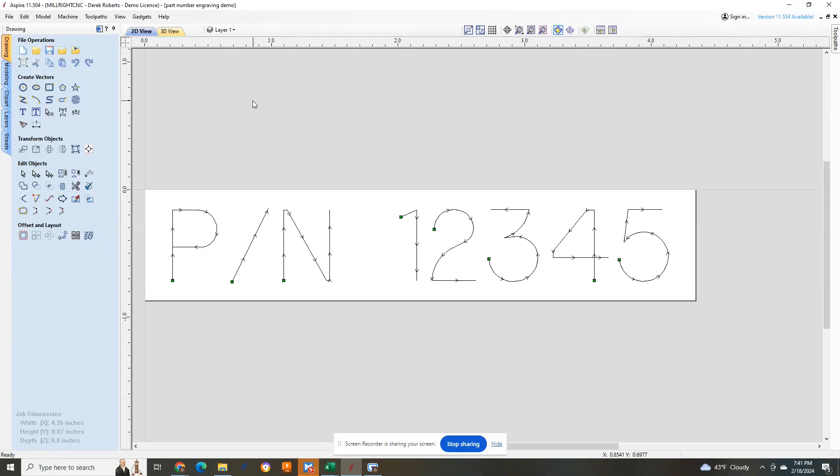I already have a file up, but once you hit the New file, you're going to be brought to this for a job setup. This is a single-sided job, and here I've put in my part dimensions that I just measured with a caliper. I'm going to zero to the material surface, which means I'm just putting the bit on top of the material, at the very top of it, and calling that my Z0. My XY datum is going to be this top left corner if you were looking down at the part.

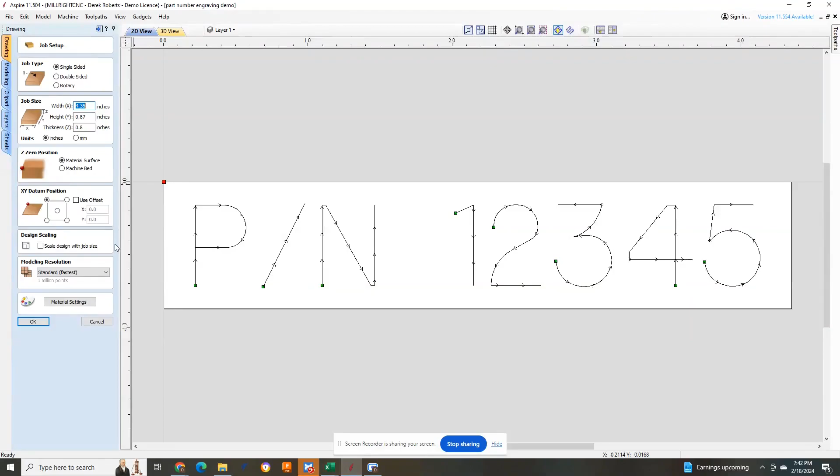I'm going to be using a vise on the Mega V2, so if you look at where my mouse is moving, you can imagine that this is the fixed jaw of the vise, and I've got the floating jaw that's going to be moved in to clamp this part. Whenever I use a vise, I always zero to the corner of that fixed jaw for my XY position. So I'll hit OK. I already have part number 1, 2, 3, 4, 5 here.

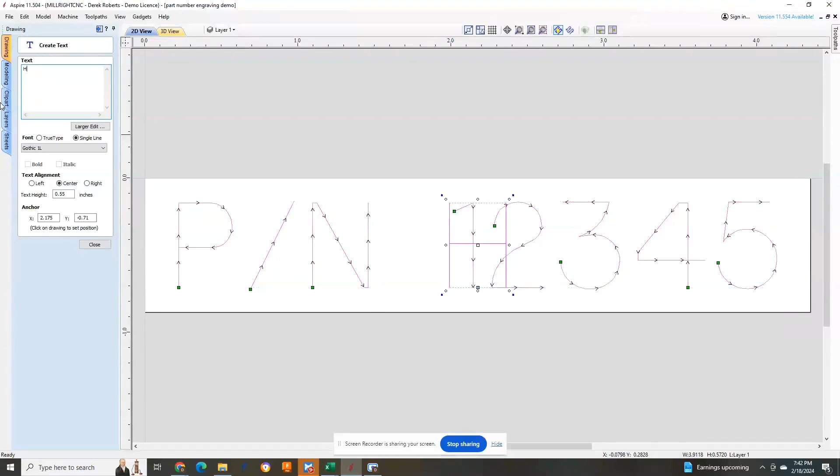If you wanted to put some new text in, you could go over to the Create Text dialog box here. But if I want to edit this text, I'm going to left click and drag over everything while I'm in the 2D view, and you see it turn that purple, magenta, whatever color you want to call that. And I can go back to the Create Text dialog box, and it's going to allow me to edit that. So I could put, hey guys, I could put whatever I want there.

All right. And you see I've already calculated that toolpath. That's why everything still remains there. So I'll just put back what I have, part number 1, 2, 3, 4, 5. My text height I can describe here, whether I want it to be tiny text, big text, whatever. Text alignment is going to be center.

And then my anchor point, I can describe a very specific position, or you can just kind of grab this around here. As you see, you move this around, you get a set of crosshairs that shows your vertical and horizontal alignment. And when you see the vertical dotted line and the horizontal dotted line, you know that you've got everything centered. So I'm going to hit close here.

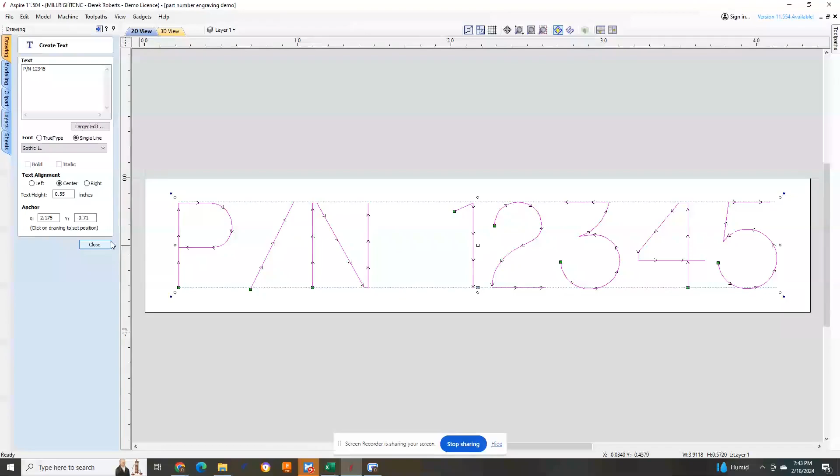Moving on to the Toolpaths tab. If you don't see the Toolpaths, you can just click on Toolpaths and show Toolpaths tab. You'll notice something that may frustrate you here. If you don't have that pinned, then whenever you click off this here, it's going to disappear. But just click the toolpath and click this little pin in the upper right corner, and that's going to keep everything there. You see I already have a quick engraving toolpath made.

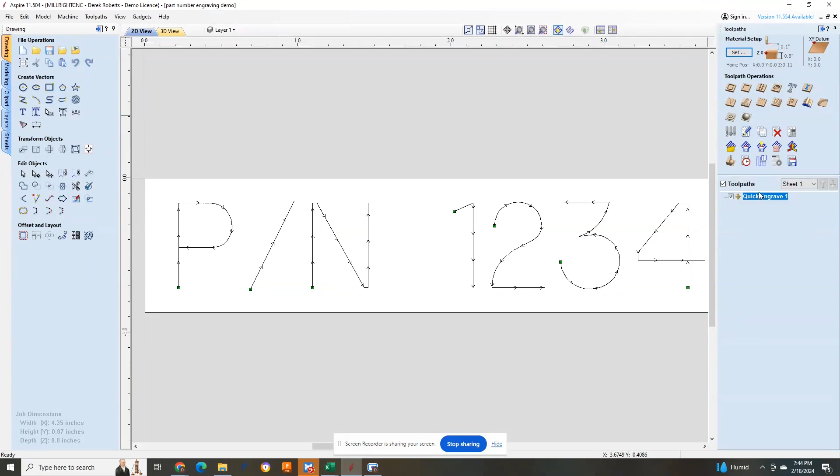If you were just starting out on a fresh file, you're going to come right here to quick engraving toolpath, click that. But the dialog is going to look the same. I'm going to edit that because I already have it. If you just click the quick engrave toolpath, you're going to get this dialog here. I have a depth of 0.008.

That's really shallow. So because I'm doing aluminum, I don't want to take multiple step downs in it. I'm using a V-bit that's really better suited to wood, but I can still achieve aluminum engravings with that as long as I am correct in how I set up my parameters. Now to set the parameters, I'm going to go to Edit. Here you see what I have set for the tool here.

I'm going to run the spindle at 15,000 RPM. I'm using a pretty low feed rate here for the Mega V2. The Mega V2 can go into the hundreds of inches a minute, but when you think about it from the perspective of the tool, if you can follow my mouse here and you just think about the point of this tool here, that is not really getting an opportunity to clear a bunch of chips.

So if you think about it in the chip load concept, if you had a really big tool, it can take a lot bigger chip load, or it wants a bigger chip load to operate in kind of its ideal state. If you've got a little bitty tool, then it wants a small chip load.

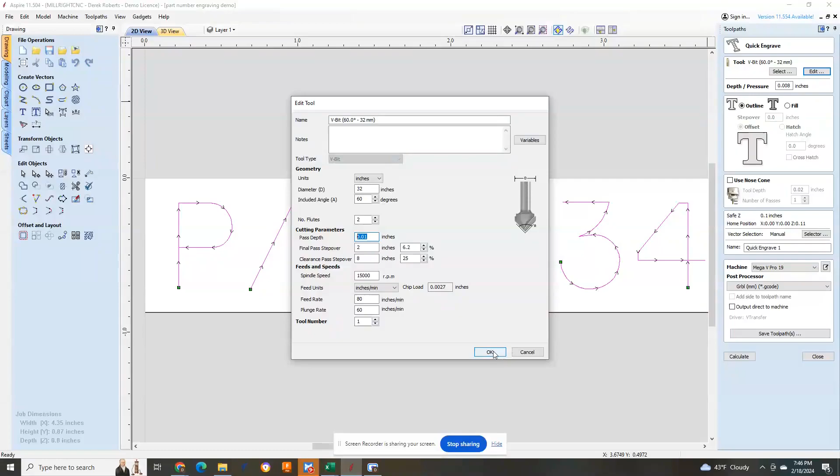You could, say, set that to 30 thousandths, in which case this 0.01 or 10 thousandths pass depth would make it take 3 step downs. But I'm happy with these parameters, and I'm going to click OK. From here, I would calculate the toolpath. I've already done that, but I'm going to calculate the toolpath.

Whenever you click that, it's going to move you over to the 3D view. I'm going to reset the preview because I think I've already done that, but you would be able to preview all the toolpaths, and it's going to show you what that looks like. My computer's moving a little bit slow, but there we go. Part number 1, 2, 3, 4.

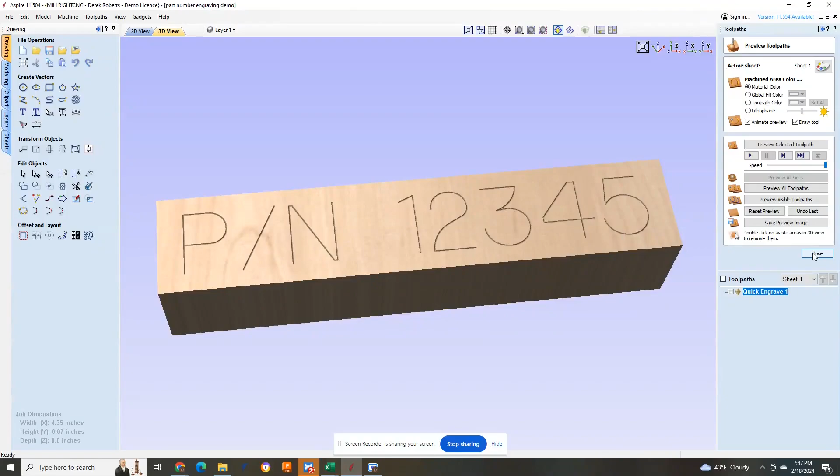When I want to save that, I can click close, and I will click this toolpath so it knows that I want to save it. I would click the Save Toolpath button there. Again, if I did that a little too quick, it's right here in the Toolpaths tab. You hover over it, it shows Save Toolpath. And from here, you can set whichever post processor you want to use.

I'm going to be using a Mega V2 XL with a Grbl control, so I'm going to select the Grbl post processor. If I was using the Masso control, I would just use Masso ATC arcs, inches, or millimeters. I like to work in millimeters, so I'm going to just select Grbl millimeters because I'm on a Grbl control. I'll save that toolpath. It'll bring up a dialog box and allow me to save it to a USB drive or somewhere on my computer.

The workflow from here is going to be, I will walk that USB drive out to a laptop that I have set up on the Mega V2. I'll plug it in. I'll open up something like Universal G-Code Sender. There's a lot of different G-Code senders available to you for free, but I would use something like Universal G-Code Sender, connect to the machine. I'll home it. I'll set my work 0.

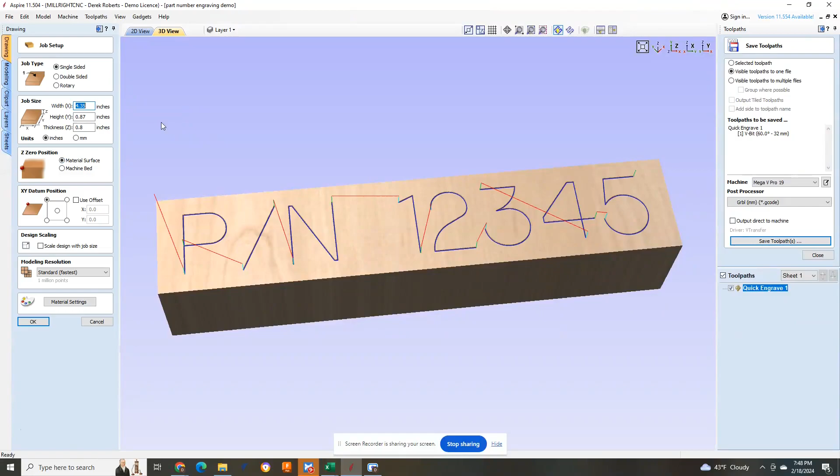Back on that topic for a moment. You have to make sure that whenever you set your work 0, I'll go back to 2D view as well, the machine needs to know that its 0 point is here. You can't just set that in your CAD and CAM or VCarve or Aspire or Cut2D. You can't just set that here. The machine does not know that you told the file it's going to start right here. Without informing it, it may think that the start point is over here, over here, over here, or over there. So you have to set that 0 point.

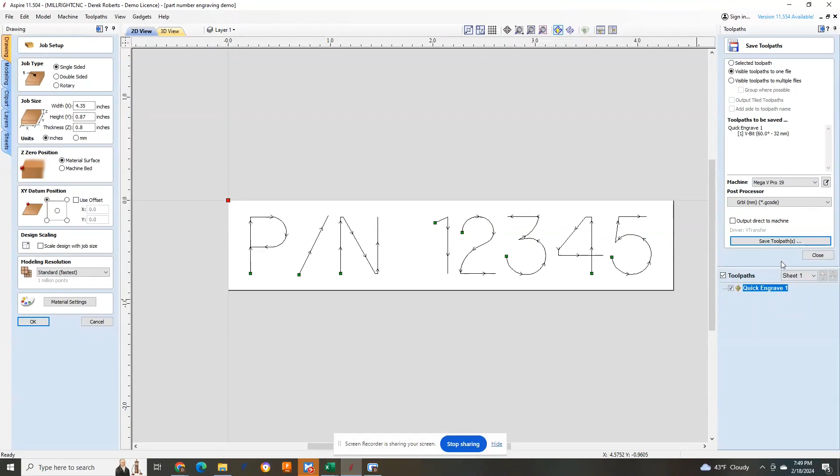But I will save the toolpath. I'll take it out to the machine, and let's move the video on to showing the engraving with the Mega V Pro now. So we have the part clamped up in the Mega V Pro XL. Let's check out the engraving.

All right, so I put a little cutting oil on there just to kind of aid in everything. I'm going to wipe that off. Came out really nice. I'll grab my tool to get this out of the vise. Yeah, came out really nice. There we are.

So I realized that that was a little bit of a bigger engraving at about a 1/2 inch tall. This one here is 0.1 inch tall. So let's see the Mega V Pro do something a little bit smaller. We'll just wipe that off. Came out nice. Again, that's about 0.1 inch tall.

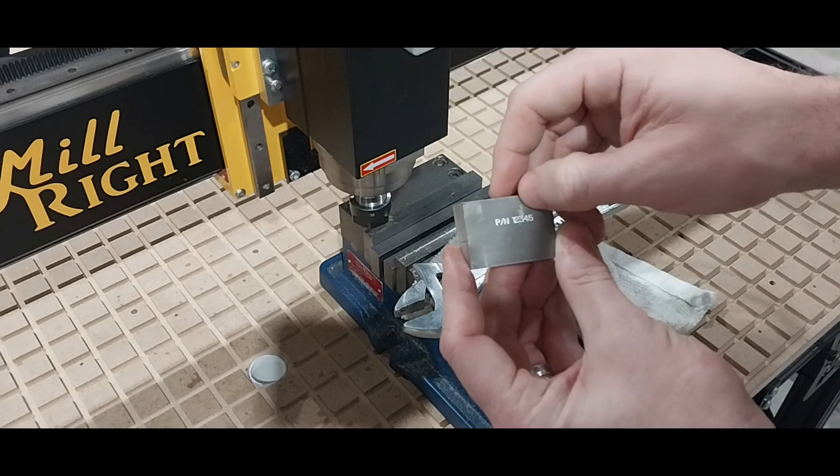There you go. So a little blemish up above it because this wasn't a faced piece. It's just a piece of stock we had laying around. But part number 12345, about 0.1 inch tall there. There you go.